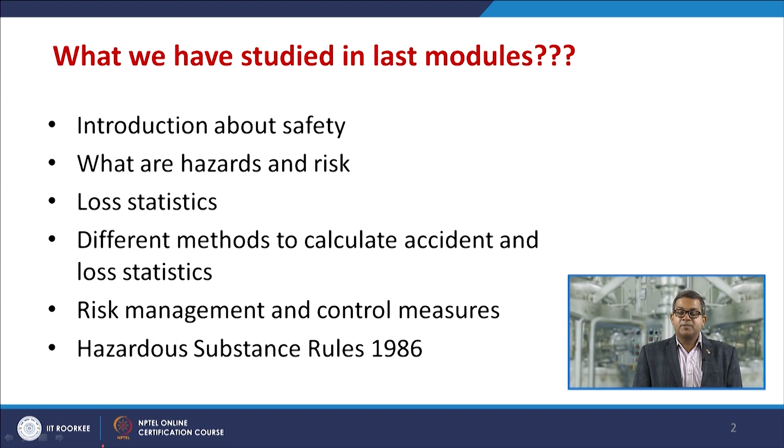Now, up till now we have studied in different modules about safety, the different types of hazard and risk at workplaces. We have performed the analysis of loss statistics, different methods to calculate accident and loss statistics. We have studied the concept of risk management and the different control measures for risk management. We had a brief glimpse of the Hazardous Substance Rules 1986 and the Factories Act 1948.

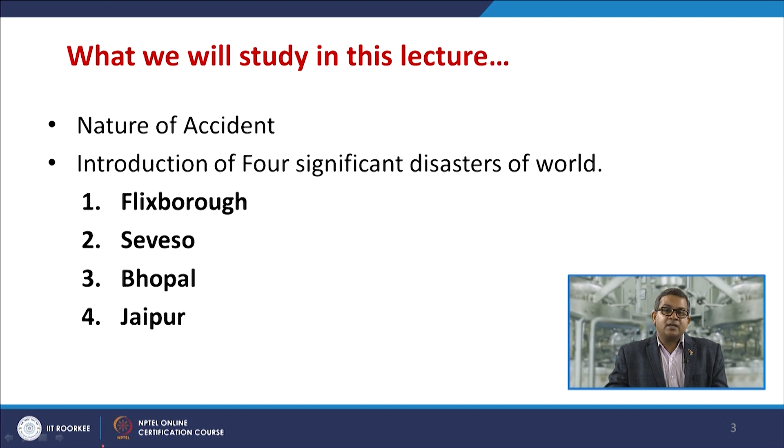Now, in this particular chapter, we are going to study the nature of accidents. Basically, we will discuss three different kinds: fire, explosion, and toxic release. Based on that, we introduce four significant disasters: Flixborough, Seveso, Bhopal and Jaipur, because these are landmark accidents, and they gave very important information about chemical process safety.

Now, there are three most common types of accident: fire, explosion and toxic release. We will discuss all three aspects in detail in subsequent modules. Basically, at this point of time, we must know the different types of accidents plus what the major hazards are, and what went wrong for those particular hazards.

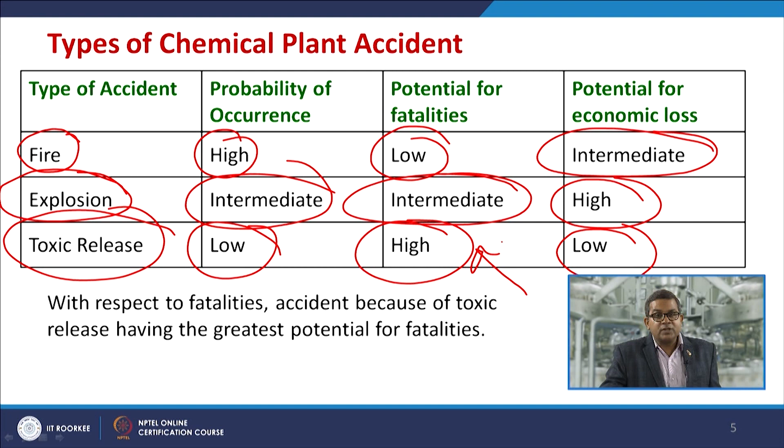Now, most accidents follow a three-step sequence, as we discussed in module 1. Initiation, the event that starts the accident: for example, somebody threw a burnt cigarette butt into dried bushes. Propagation, the event that maintains or expands the accident: a portion of those dried bushes ignited, releasing thick smoke and hot flame, and the fire starts to progress to another part of the bushes.

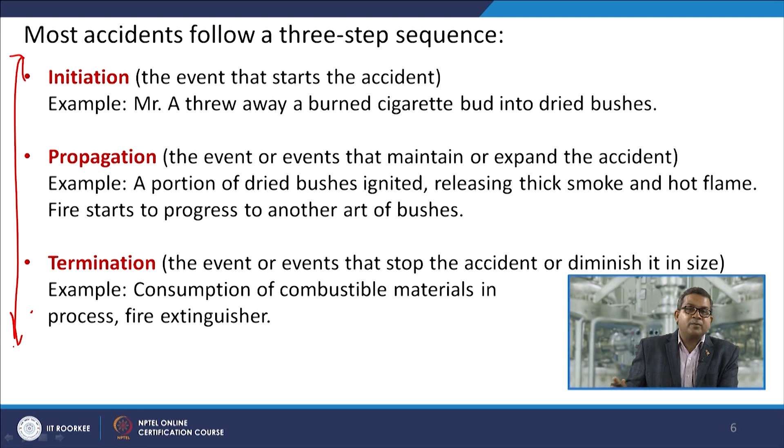And termination, the event that stops the accident or diminishes it in size: the consumption of combustible material in the process, or sometimes fire extinguisher. Remember, I talked about the Jaipur incident. The IOCL depot caught fire, and that accident followed the three steps of initiation, propagation and termination. We will discuss this in subsequent slides.

Now, there is inherent safety. The major approach to inherently safer process design is divided into five segments: intensification, so that the chances of fire, explosion or toxic release may be diminished; substitution with suitable chemicals that are less toxic and less inflammable; attenuation; limitation of effects, which you must analyze; and simplification of the process, or simplification and error tolerance.

The four buzzwords to describe inherent safety: minimize, substitute, moderate conditions, maybe use of low temperature or low pressure. Of course, it may give you a low yield or low conversion, but your expenditure on safety may be on the lower side.

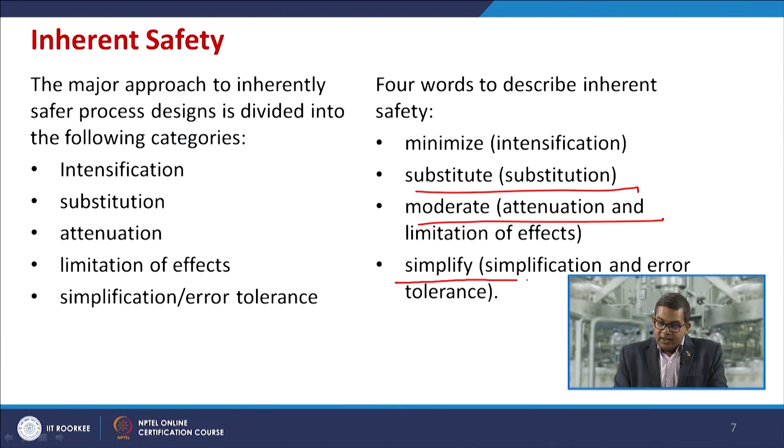Simplify, you must follow the concept of KISS, keep it simple and safer. Now, before we go into detail of fire, toxic release and explosion, we must have a brief idea about the different accidents, those landmark accidents.

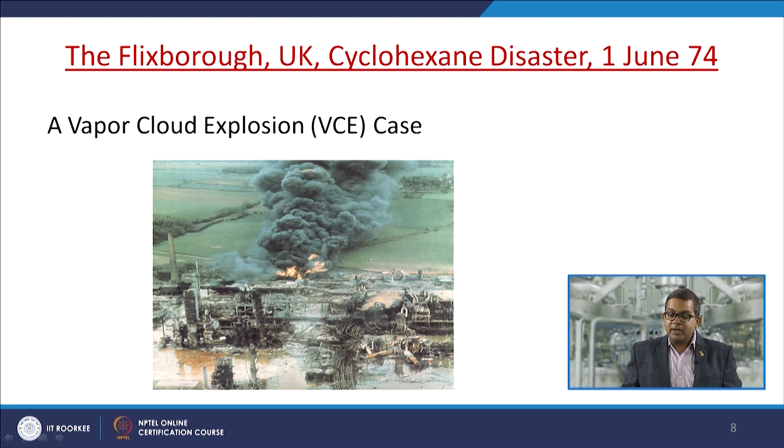The first one is the Flixborough UK cyclohexane disaster, which took place on 1st June 1974. This was purely based on the vapor cloud explosion. The Flixborough disaster was an explosion at a chemical plant owned by Nypro UK Limited, and this occurred in Flixborough, England on Saturday 1st of June 1974 at about 4:53 p.m. This particular figure is taken just immediately after the accident.

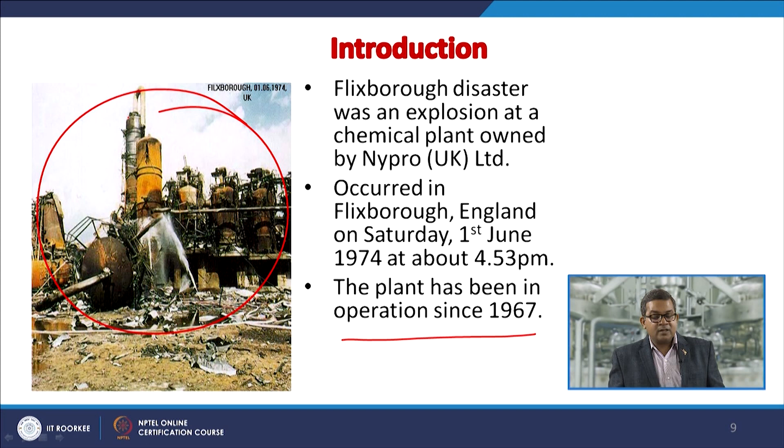Now, before I give you a brief description about the accident, let us have a product description. The raw material was cyclohexane, the formula C6H12, molecular weight 84 and boiling point 81. This is very vital information, and you can have this information from the material safety data sheet for each and every component. Cyclohexane is a volatile liquid with a low boiling point at ambient conditions, something like petrol.

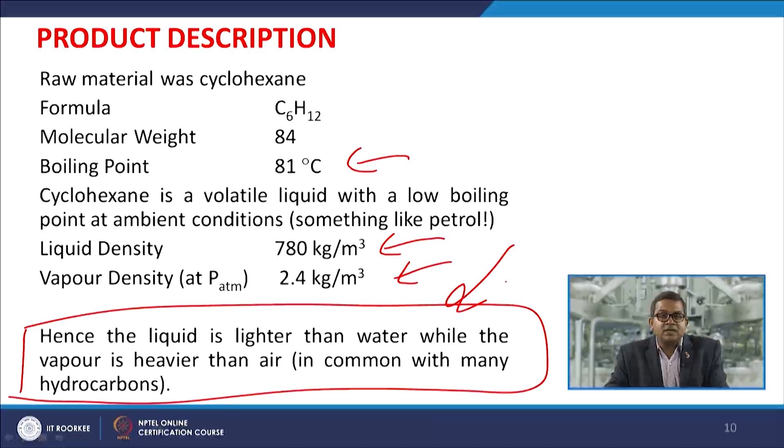It has a liquid density of 780 kg per meter cube, and a vapor density of 2.4 kg per meter cube. This aspect is essential. The liquid is lighter than water, while the vapor is heavier than air. This is common with many kinds of hydrocarbon. This is again very important information, because for every accident you need to go for accident investigation so that it cannot occur in the near future for the same type of scenario. All this information you can have from the material safety data sheet.

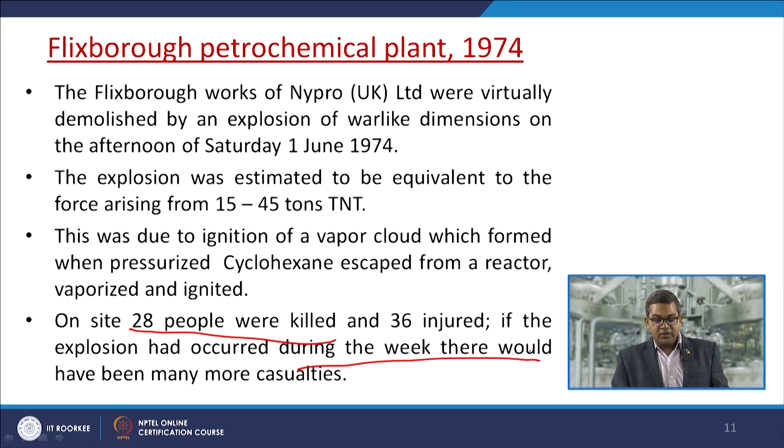The Flixborough works of Nypro was virtually demolished by an explosion of warlike dimension on the afternoon of Saturday 1974. The explosion was estimated to be equivalent to the force arising from 15 to 45 ton TNT. This was due to the ignition of a vapor cloud, which was formed when the pressurized cyclohexane escaped from a reactor, vaporized and ignited. Remember, the initiation, propagation and termination all took place in that accident. On site, 28 people were killed and 36 injured, and if the explosion had occurred during the week, there would have been many more casualties.

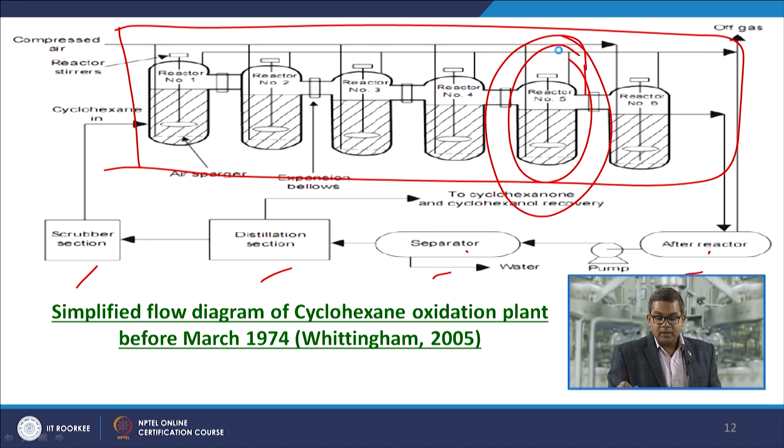Now, what happened? Reactor number 5 was faulty. They sensed that something went wrong. So they bypassed reactor number 5, and installed a flexible pipe to connect reactor number 4 with reactor number 6. No doubt there was a very small amount of conversion loss because of the kinetics, but simultaneously it is extremely dangerous in nature. We will go in detail when we discuss this accident in detail in the accident investigation.

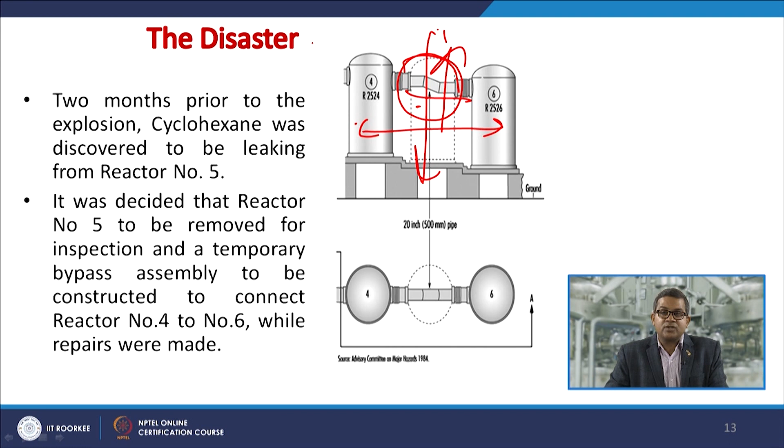Without much loss in yield, they bypassed it, and it lasted around 2 months, because 2 months prior to the explosion they discovered a cyclohexane leak for a variety of reasons. So they detected a leak and decided to bypass like this. Now, because of pressure fluctuation, this pipe was dislocated, and 80 ton of cyclohexane, or a mixture of cyclohexane and cyclohexanone, was exposed to the atmosphere. It created a vapor cloud, the sources of ignition were enormous at that time, and somehow this vapor cloud got ignited, just like a fire cloud.

As a result, 28 people were killed and 36 seriously injured. The records and charts for the startup were destroyed. The fire remained burning for over 10 days because they had a large quantity of inventories in their store and warehouse. Large quantity means cyclohexane, cyclohexanone and other allied products. They had other flammable products, a large quantum of those inventories.

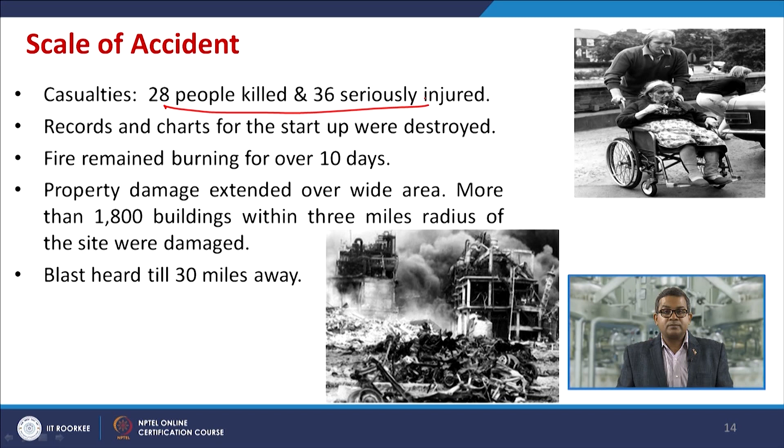Property damage extended over a wide area. More than 1,800 buildings within a 3 mile radius of the site were damaged. The blast was heard 30 miles away. The reason was the pressurized vessels were exposed to the atmosphere, and cyclohexane is extremely flammable in nature. This is evident from the data given in the previous slides.

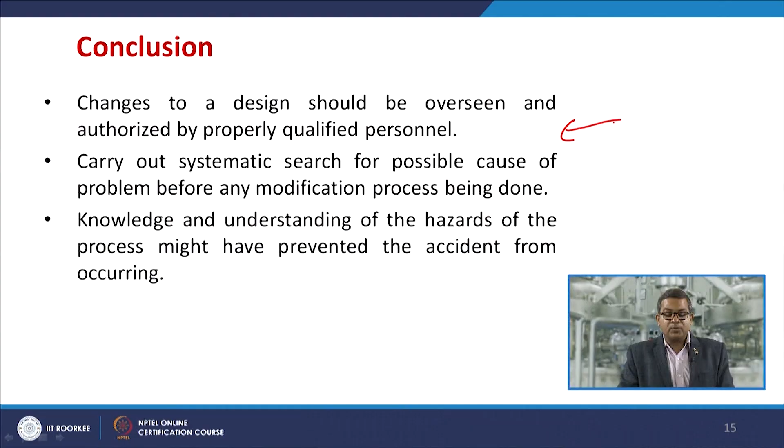Now, after accident analysis, they found out certain points: changes to the design should be overseen and authorized by a properly qualified person. Carry out a systematic search for possible causes of the problem before any modification is done, because unfortunately they didn't carry out any kind of pressure and temperature analysis for this particular modification. Knowledge and understanding of the hazards of the process might have prevented the accident from occurring.

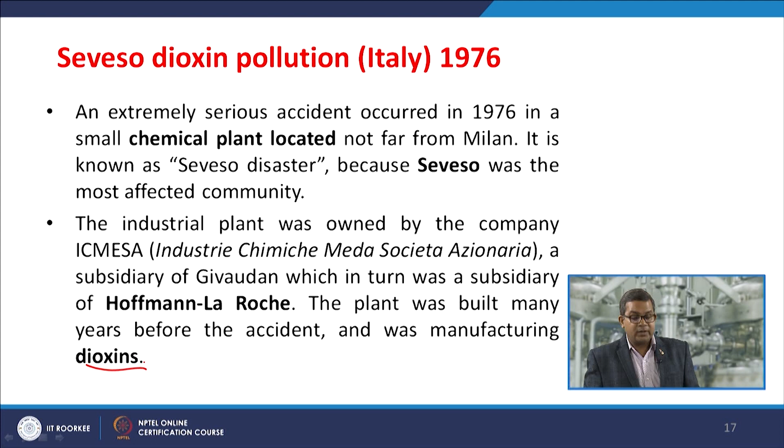The plant was built many years before the accident and was manufacturing dioxins. Dioxins are a very serious hazard to humankind. Now, due to the mechanical failure, the temperature rose to around 300 degrees Celsius, and the relief valve eventually opened. 6 tons of material, including 1 kilogram of TCDD, tetrachlorodibenzodioxin, which is extremely toxic for human beings, was released over an 18 square kilometer area.

Dioxin first came into widespread public notice during the Vietnam War, when it was identified as a component of the defoliant Agent Orange. Previously, the substance had been banned from agricultural use because of its alleged toxic effect on humankind.

Now, the safety measures: this is again slack negligence from the company officials' point of view, because it was a 2-step process. The first step is usually carried out at a stipulated temperature, and there was a necessity to lower the temperature by the addition of water, and it was neglected by the plant officials. That is called human error. Once it was neglected, the temperature remained at 150-160 degrees Celsius, and due to the thermal runaway reaction, the temperature rose up to 300 degrees Celsius, and all the safety devices failed at that point, because the reactor was not designed to handle such a scenario.

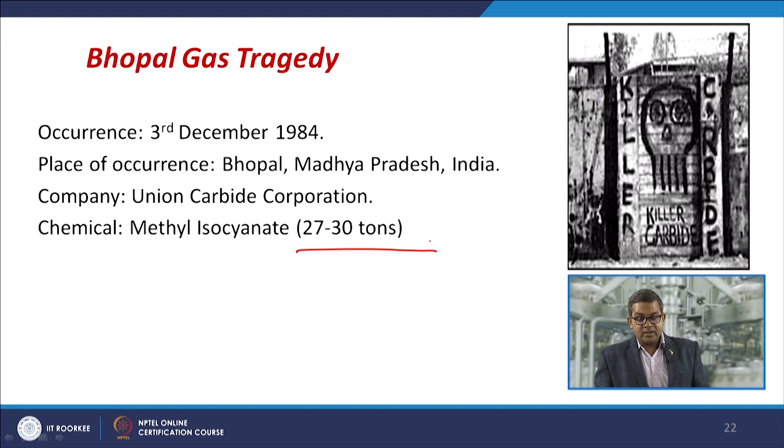Now the third major accident is the Bhopal Gas Tragedy. You can see the severity of that accident. It occurred on the night of 3rd December 1984, and the company that owned the plant was Union Carbide Corporation. The chemical released was methyl isocyanate, in a quantity of about 27 to 30 tons. Now, the severity you can see in this slide: 500,000 people were exposed to the gas.

25,000 have died to date as a result of this particular exposure. This is an approximate figure. More than 1,20,000 people still suffer from different types of ailments caused by the accident and the subsequent pollution at the plant site. This may be attributed to the gene changeover because MIC is again more prone towards the change in the genes. These ailments include blindness, extreme difficulty in breathing, and different types of gynecological disorders.

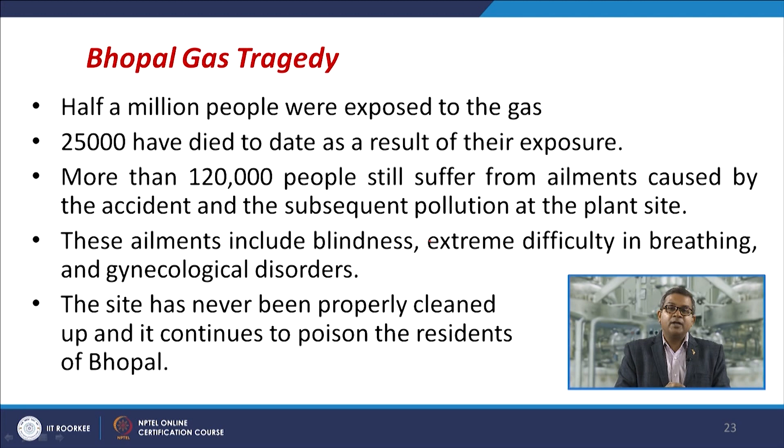Now this site has never been properly cleaned up, and it continues to poison the residents nearby. We will discuss this Bhopal gas tragedy in detail with due attribution to accidental analysis. Now Union Carbide Corporation started their activity in Bhopal in 1969, and the materials they used were phosgene, monomethylamine, methyl isocyanate, and pesticide carbaryl, and they used to produce the pesticide with the commercial name Sevin.

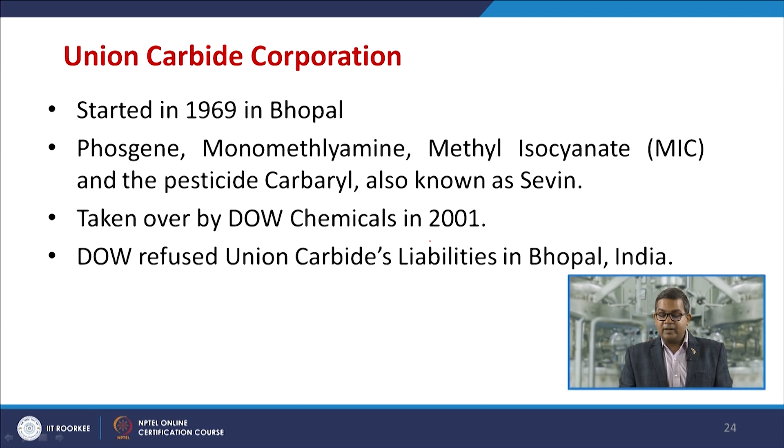It was taken over by Dow Chemical in 2001. The unfortunate part is that Dow refused to take Union Carbide's liability in Bhopal. Now see, almost 25,000 killed, and still 1.2 lakh severely affected. Still they are suffering, and we thought that only weapons could cause mass destruction. This is mass destruction.

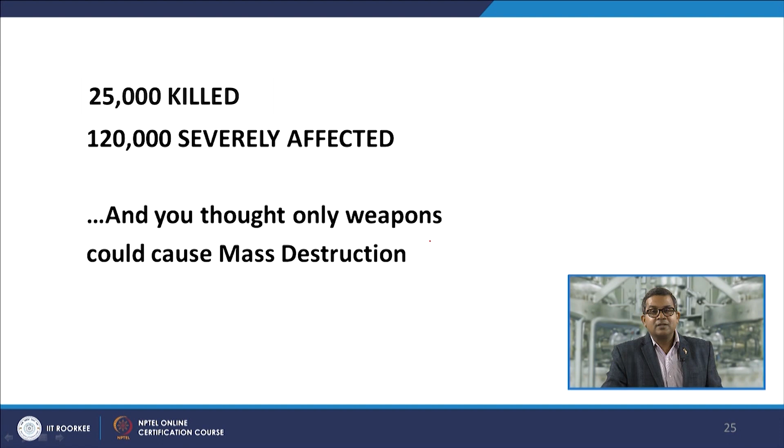The Jaipur Terminal Fire happened on 29th October 2009. IOCL has this Jaipur terminal, and in addition to this, the plot accommodated the facility for the pipeline division, which operates cross country because it was on the pipeline grid. The Koyali-Sanganer product pipeline fed that particular terminal. The marketing terminal occupied 105 acres of land, and the pipeline division facilities were located in 15 acres in the northeast corner of the facility.

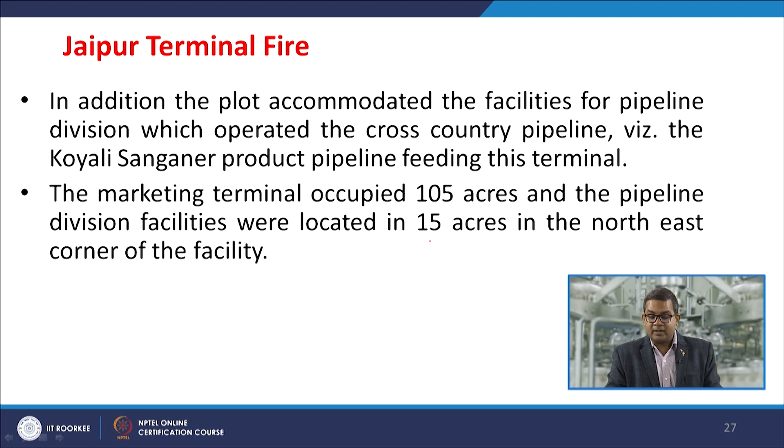Now there was a sudden release of petrol and diesel from this particular facility, and a vapor cloud was formed, and somehow this vapor cloud got ignited, and initiation took place. Now, because of the combustion of these petroleum products, a lot of heat was liberated, because of delta H, the enthalpy content of those petroleum products. Because of the net release of energy, all other tanks got heated up and a vapor cloud tended to form. Because of this vapor cloud, through conduction, auto ignition or radiation, the remaining tanks got ignited and propagation took place.

And plant officials were not in a position to control these things. So, termination was not possible at the moment, and they followed the let it go policy. So, they waited for a long period for the fire to consume all the petroleum product within the plant. About 60,000 kiloliters of petroleum product was stored in that terminal at the time of the accident, and the installation was totally destroyed. Buildings in the immediate neighborhood were heavily damaged, and minor damage and window pane breakage occurred up to 2 kilometers from the site.

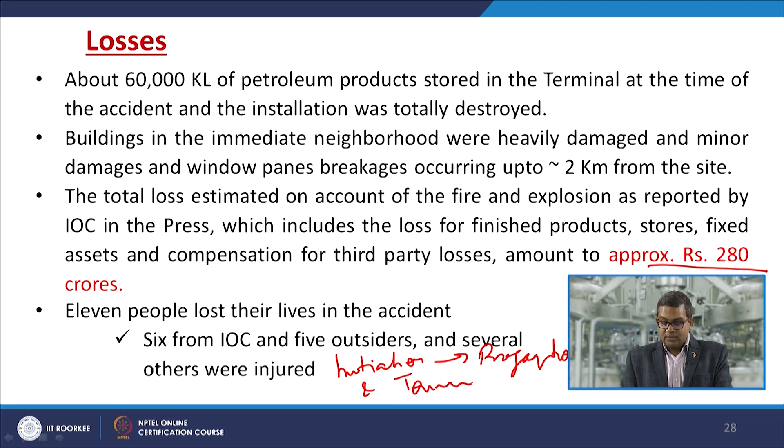So, this is a true example of initiation, propagation and termination. And for termination, the usual control measures didn't work. They were not even in a position to control that particular fire because of the generation of a lot of heat. So, a few lessons learned from the Jaipur incident are highlighted: facilities and installations with inherently high hazards should incorporate redundancy in safety systems and ensure their upkeep at all times.

Management should ensure that reliable systems are in place to give timely feedback on the current practices and state of readiness in different facilities. Management must ensure that identified actions are being carried out. A high priority on safety from the senior and top management group will send the right signal down the line to ensure safety and production.

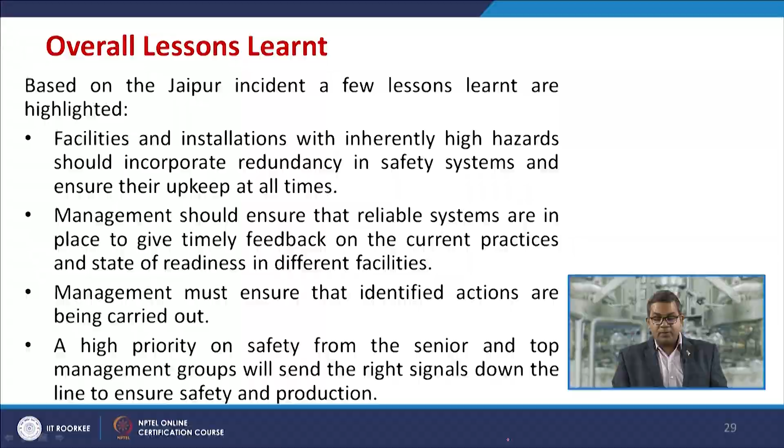Now, in this particular module, we have studied safety and different accidents. We have studied the major things in safety, things like fire, toxic release and explosions, etc. In the subsequent modules, we will discuss all these things in detail.